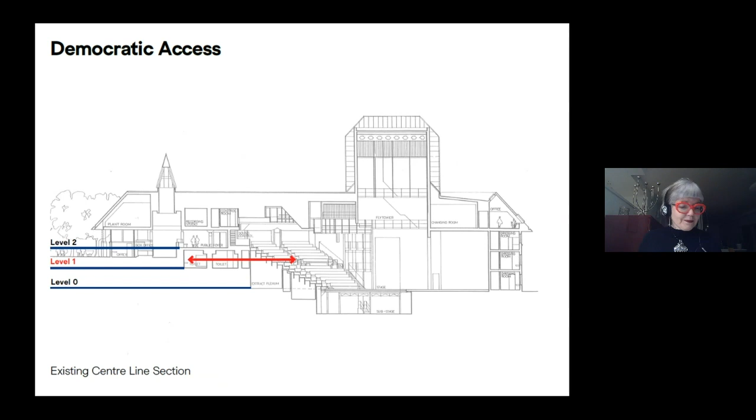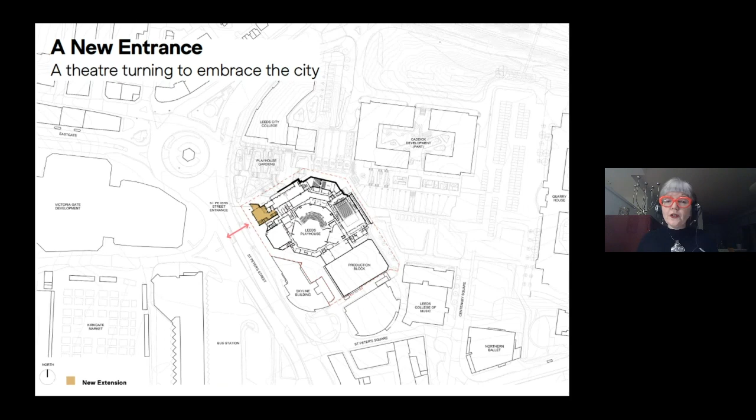If you could move on. Just to help you orientate yourself before we go into the virtual tour, the building is quite complicated because of the levels and the topography, and hopefully it now entices people to explore.

What we can see is the new entrance at the bottom of the slide off St Peter's Street, and within that new extension we now have a large passenger lift and a new stair that serves all the levels, because before there was only one small kind of easily accessible passenger lift. We were also able to manipulate the plan to get a level, direct, covered access into the Barber Studio, which is a significant space in the building and the main rehearsal room that they have.

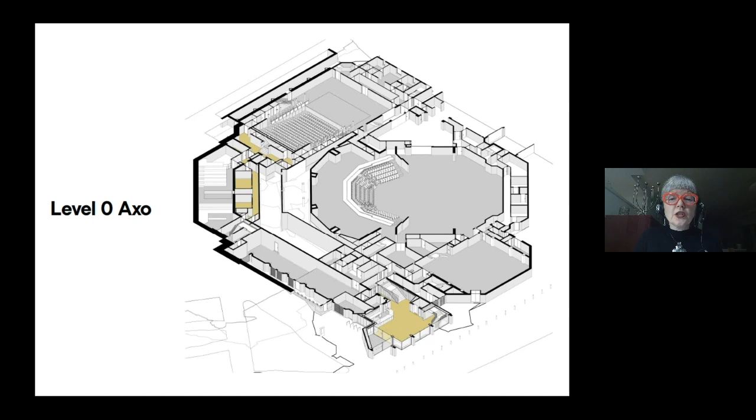What's toned up in gold towards the centre of the slide is some of the support accommodation for the Bramall Rock Void, this new intimate small scale studio that we created using the undercroft of the existing entrance of Playhouse Square.

So the next level up is where we made the fundamental changes, and we really drove and carved out this new route that linked back to the new extension, which is 05 on this diagram, and then leads ultimately up to the former entrance of Playhouse Square, which is 01 on that diagram. What we were able to do was create a new box office, an interval bar, which is just by 04, which is now literally the heart of the building, and to open up the north elevation of the building so that we could get better connections with this new external landscape space. But most importantly, what this enabled us to do was create new connections directly into the Quarry Theatre, which is 06, and the Courtyard Theatre, 07.

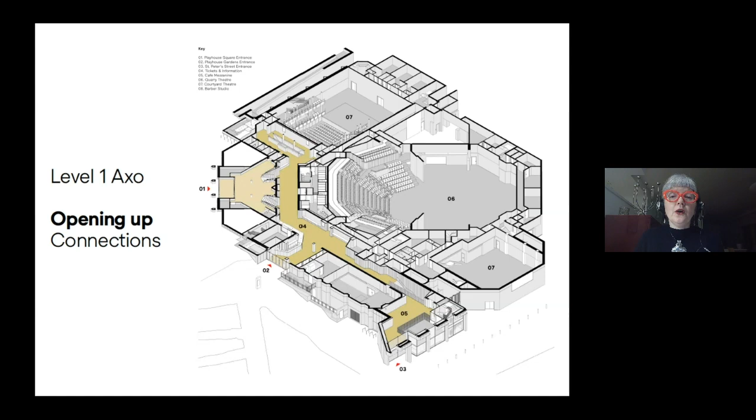So in terms of the plan, the Quarry Theatre on the right hand side there, what we've toned up are the wheelchair positions, which formerly were on the very periphery of this fan shape, and now you can feel much more embedded in the heart of the audience. In order to get to these positions, we formed two new ways in, two new vomitory entrances. The fundamental difference that's now made, I think, to people is that they arrive on this space and they immediately engage with the stage. There's an immediate connection there, whereas before you kind of arrived in the space and you were just standing at the top of these steep stairs, kind of being really worried about your footing.

We opened up the theatre at the back as well so that we could compensate for the loss of seats further forward and create some better wheelchair positions there.

And the Courtyard Theatre, that wasn't in the original brief when the original feasibility study was done, but the Playhouse were very keen to increase seating capacity by removing the retractable seating bank that you see in the top diagram there, and then using the recess at the back of that space that the seating retracted into to create this shallow fixed rake, and we could get an extra 3 rows of seats at the back.

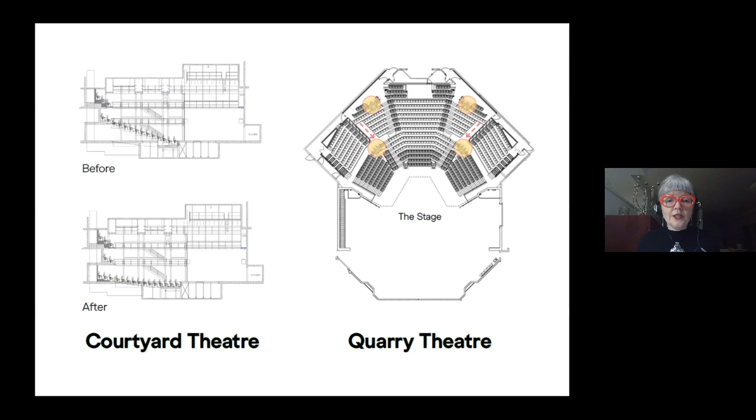Thank you. If we could move on.

And so then we move up a level. From the kind of reconfigured entrance of Playhouse Square, we then move up half a level to the principal foyer area. Now, we didn't fundamentally change that too much. We refurbished the bar and the restaurant and the kitchen areas. But what we have been able to do is allow that then to expand into the new entrance extension. And by the reconfigurations around either side of the entrance of Playhouse Square, we've been able to put in a lot more public toilets and also a new hospitality space, the Brook Room.

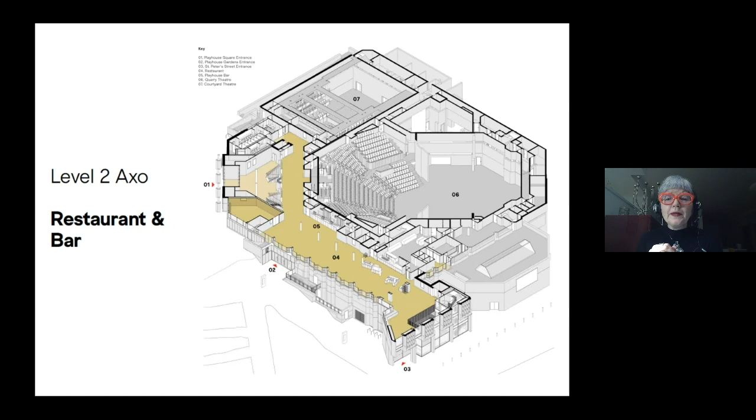Then if we move up finally to the top floor, there at the very top of the new extension, we created yet another hospitality space which has fantastic views out across the city and connects with the city. And then we cut a sneaky little corridor through the slated mansard roof to create a direct link from the new foyer and the new lift and stair through to the toned area in the centre of that image, which is the Congreve Room. Now that was formerly a hospitality space, but in order to get to that you had to go through a secured access door. So now you can reach that as part of the public foyer system.

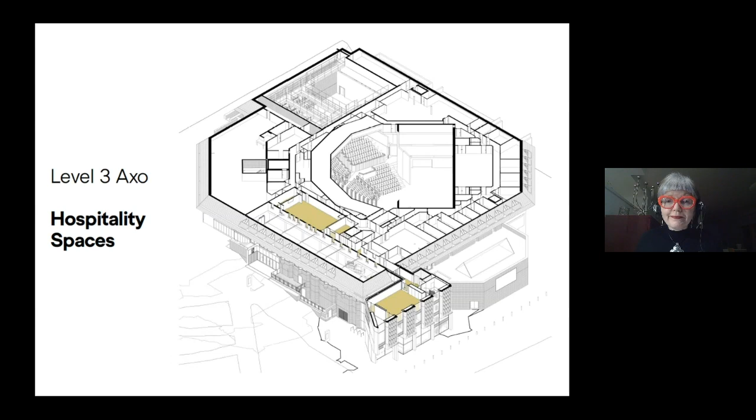Thank you. So the most striking element of this redevelopment in many ways is, of course, the ceramic facade, and that is very, very rooted in Leeds, and deliberately so. When we started visiting the city and getting to know it better, we realised just how many fine buildings around the city use ceramics and faience.

But being able to use ceramics enabled us to exploit the plasticity of the material, and so we looked to develop a 3-dimensional tiled module that harked back to the original geometries of the building. If we could move on.

And then, of course, the Leeds Playhouse are professional storytellers, so they kept pushing to say, well, what's the narrative behind these?

We have 4 ceramic panels and there are 4 key performance spaces in the building, and we use colour to help with orientation. The black tiles symbolise an actor standing at the edge of the stage in the footlights, looking out at his audience. The colours are brightest at the bottom and recede into darkness as you move up the panels.

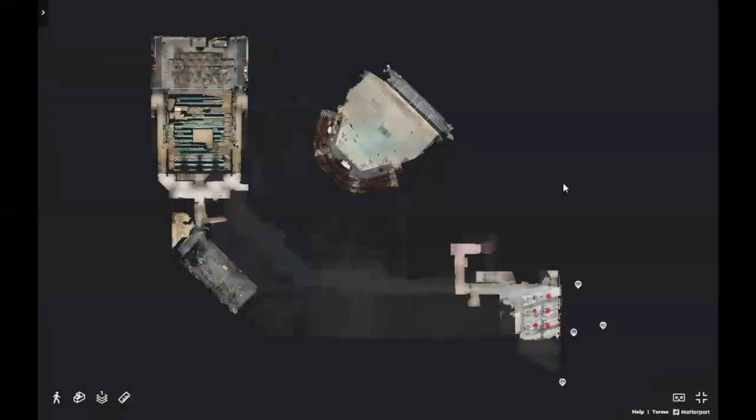We start at the beginning. Our new extension faces the approach from the city centre along George Street and Eastgate, and aligns with a new pedestrian crossing across St Peter Street. It obscures that very defensive, low-slung tiled roofscape which previously greeted the approach. Hopefully there's no doubt that you're approaching a civic building with our new extension.

The ceramic panels are set between deep precast concrete piers, alternating with tall strips of curtain wall glazing, which give passers-by and motorists a glimpse into the life of the theatre inside. Each panel represents a theatre, with each assigned a distinct colour scheme, and you'll notice when we walk through the building that we have also used these colours internally to help with wayfinding and to identify each performance space. Panels are also lit from below, which you should see later in one of our supporting slides.

A final flourish is that the extension is crowned in large individual illuminated letters spelling Playhouse, each sitting atop one of the precast piers. This was fairly serendipitous, that the number of letters aligned with the number of piers, as our design for the facade preceded the idea of placing the building signage at the top. The signage itself is reminiscent of the original Leeds Playhouse building on the Leeds university campus, and for us it also further connects the new extension to an earlier, more recognisable language of theatre.

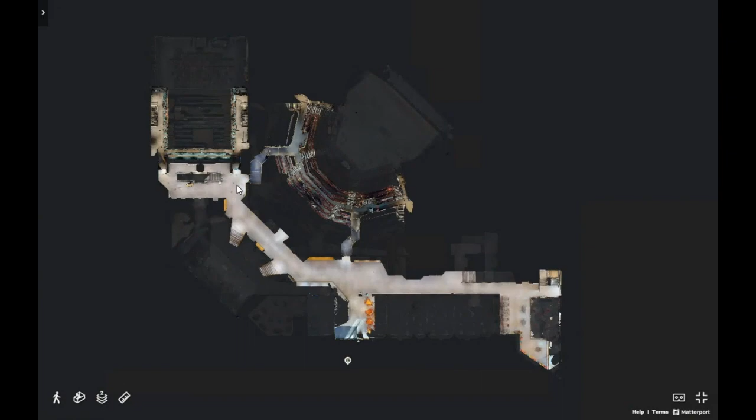Again, new seating and new paintwork to the existing metalwork. So from here, we can jump to the Bramall rock void - or actually we'll jump back out into level 1, the main level.

We can go down the set of existing stairs - again, we just painted these black to define our route - and down to 0 level. This is at the same level as Playhouse, or St Peter Street.

Previously, in the existing building, this only served the stalls level of the courtyard. This would have been an existing wall, which we've now carved a void through to enable entrance into the Bramall rock void space. This is our new space, carved out of a former basement void below the original entrance.

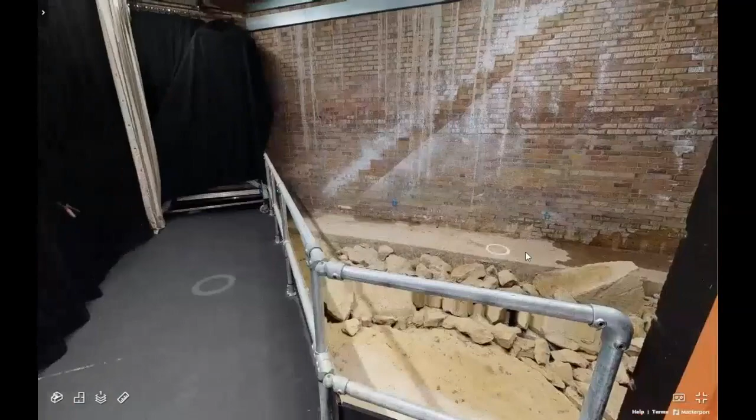On your right, you can perhaps get a glimpse of the rock where the name comes from. This is essentially a found space, and we were quite keen to keep the raw aesthetic - we achieved this by just sealing the brickwork and exposing the surfaces. It's got a distinct character, this space, compared to the other performance spaces.

It's fairly intimate, a 100-seat venue, perfect for small-scale productions - a fairly flexible space which can support the Playhouse Creative Engagement Programme, supporting that nurturing idea that was part of the briefing process at the early stage.

So from here, we can perhaps jump back to level 1, Playhouse Square - or the main level. Here we can pivot round and continue our route from the mid-tier. Again, quite a bit of banquette seating, and so we continue up the stairs.

Onto Playhouse Square level - this was originally the existing entrance. And if we pivot right back round - stairs on the right, immediately to the right and the left, these are symmetrical stairs which we carved into the existing building.

The right-hand stair leads directly down to the extension on St Peter Street. And if we can pan up, it's an existing glazed cupola roof light with an exposed concrete ring beam, which retains the memory of the existing West Yorkshire Playhouse name. We thought it was important to keep, to build on that historical development of the building.

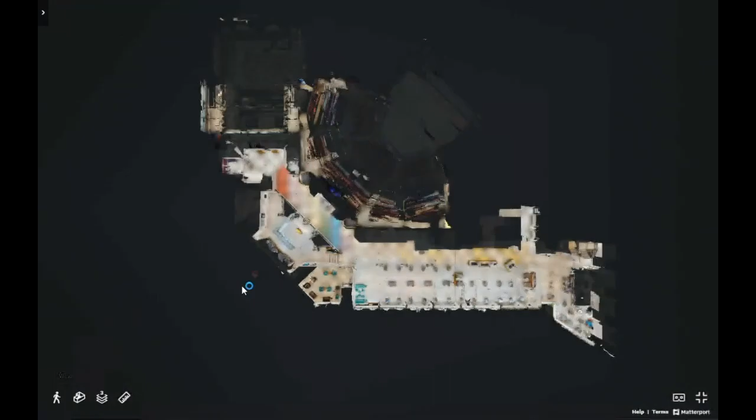So if we could ascend our new set of additional stairs up to the half level, onto level 2.

If you pan left, it's worth mentioning that we still retained existing access at the upper level to the Quarry Theatre, although we reconfigured the doors and openings because we had to get rid of the lobby to increase the seating count in the theatre. But we've used the same colours again, so it's quite clear that there's still an entrance at that level to the quarry.

Existing bar - as part of our works, we replaced the fairly tired bar and restaurant servery, which is further along. No real fundamental other changes to this area apart from repainting the area and the window frames.

Although if we go further in, we can pivot back and have a look at the new Brook Room Hospitality area, which replaces an existing hospitality room on the lower level, which we lost due to the fairly fundamental reconfiguration of that level.

And if we pivot back again, we can continue on towards our extension. Main intervention here was to draw our new floor plan into the existing floor plan into the extension area, as this better connects level 2 to cafe and foyer levels below.

You start to see in plan we've created this sneaky corridor through which connects the new extension to the existing building. This helped us to rationalise the public side of the building and connect it to the extension.

So we could head on down and have a little look at the reconfigured western room. On your left, these are existing windows which look into the restaurant area, and on the right you get a glimpse into the back of house areas and the offices and the supporting function of the playhouse. So again, no fundamental works to the western room.

If we can pivot back and head back to the extension. So we can see, on your left, pass by some meeting rooms, tea prep. On your right, you can get a glimpse again down into the restaurant.

So again, we approach the new - and the creation of this room is very important. This new hospitality room supports the resilience that was required by the playhouse for long-term financial stability. I think the city room is quite aptly named because of its views out back to Leeds City.

And some great views created here at the top of the extension. Obviously disappointing that we couldn't conduct this tour in person, although we've got further slides and videos which should show these spaces in a little bit more animated fashion.